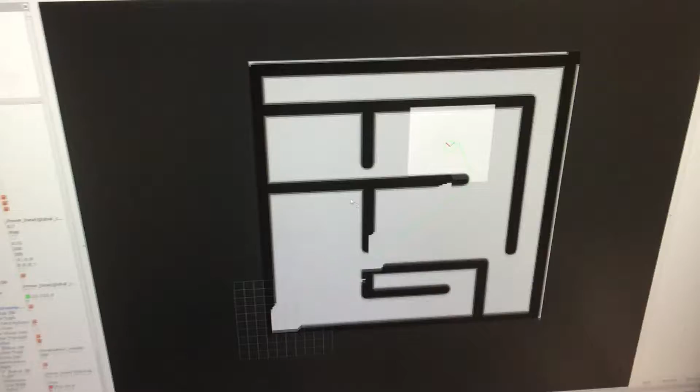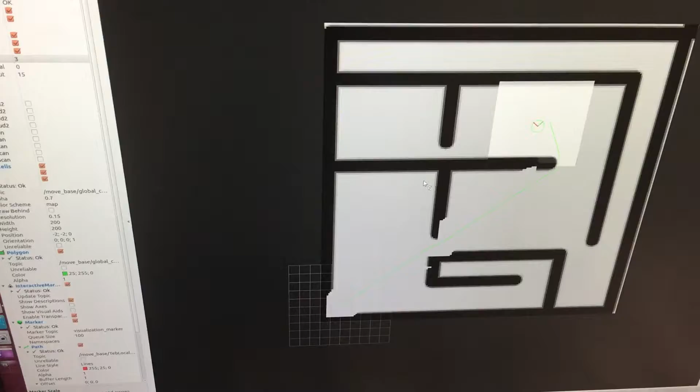Alright, here's a video of us implementing the elastic band planner. So here we have the simulator running on this side, and hooked up to our simulator, of course, the Matrice itself. And on this side we have the simulator running on one of the onboard computers. And this is how we plan on performing obstacle avoidance.

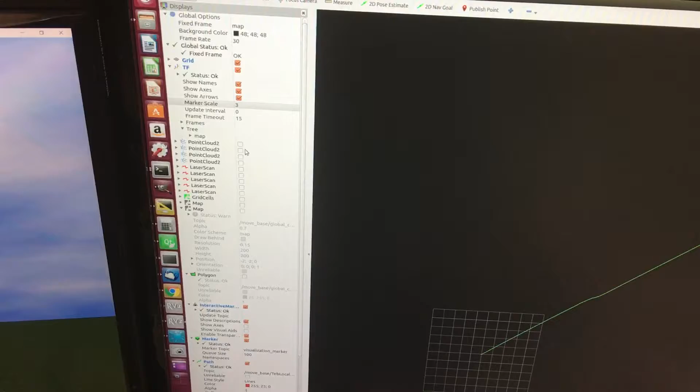Basically we have laser scans; we have both point clouds and laser scans. Let me just show you what they look like. They won't make much sense on the map just because the machine's currently sitting still behind me and not actually flying through a virtual environment. So those are the point clouds.

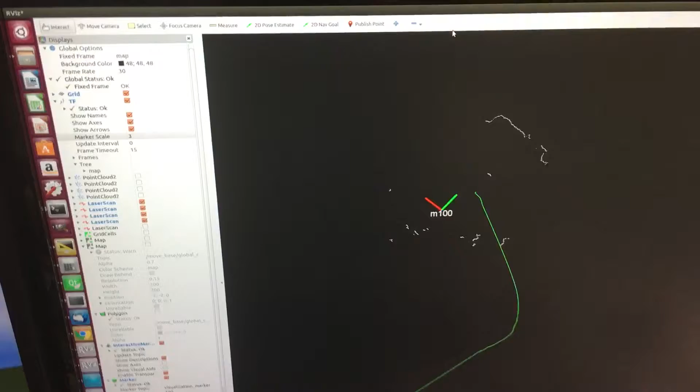And more useful for localization, which we do use AMCL for, is these laser scans. So here you can see the outline of my living room. And these are just laser points that are basically extracted from the point cloud. And this allows them to be used with other packages such as AMCL or even G-mapping if we want to create maps.

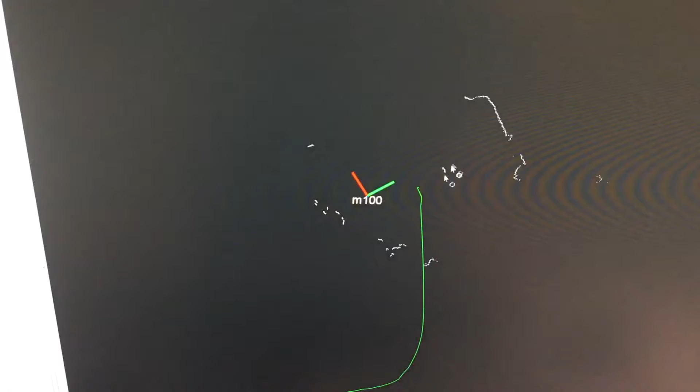There are packages that use point clouds, but unfortunately, given the limited processing space and the fact that we probably don't need 3D maps, a 2D map will do the job. And this will be great for localization inside of a building, and that way we can ensure that our Matrice has no problem finding its way back out through the door. So those are the sensors that we'll be using mainly for obstacle detection. Off, and go back to the navigation simulator.

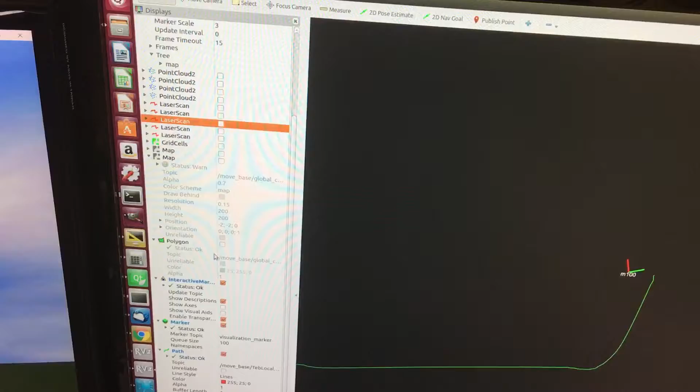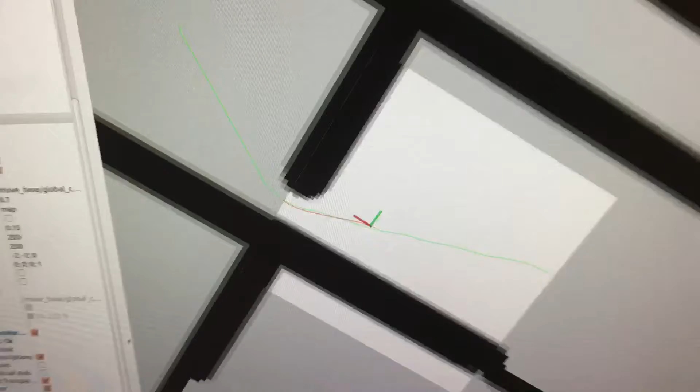Alright, so here we're back at the simulation. There are currently two methods we implement for navigation. The default ROS stack uses what they call move base, which are velocity commands. But as you can see, there are these lines that are generated for the trajectory. We can actually use those lines for navigation as well. So instead of using velocity, we can use waypoints.

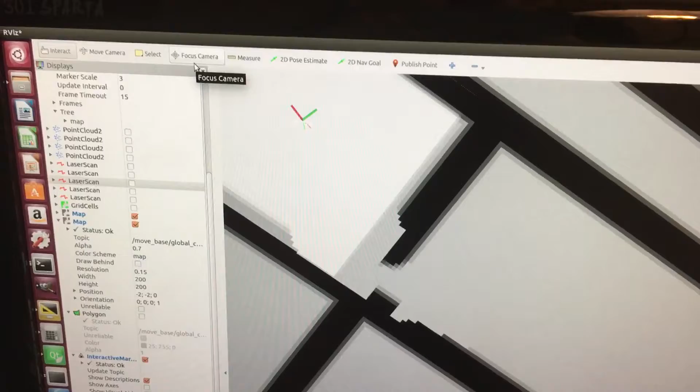So you notice there are two lines. There's actually a local trajectory and a global trajectory. The global trajectory has a much slower update, so it's not as useful for obstacle avoidance, or something that is dynamically generated. So for obstacle avoidance, if we want to use waypoints on the trajectory, we probably want to stick with the local trajectory. And that one, I think we have set updating at 20 Hertz.

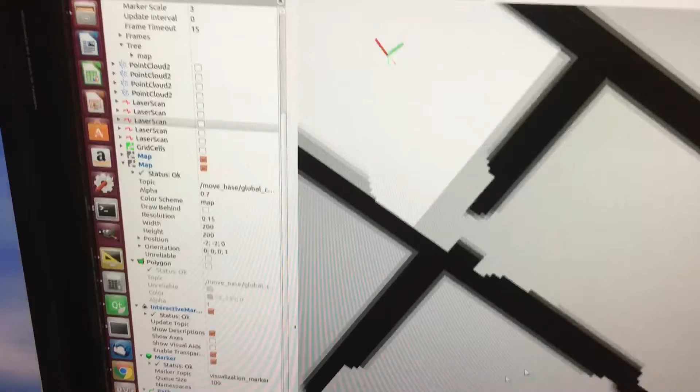So just a quick demonstration. See if we can make it all the way there. And just to show you that it's actually being run on a simulator right here. There it goes. So the red line is the local trajectory, and the white box around it is the local cost map, and that's the cost map that's mainly used for generating updates for obstacles.

So here in this demonstration, I believe we're using the velocity commands, and they work pretty well, mainly because they are kind of slow. Let's take a look. Yeah, it's barely approaching. So if you add those two up, it's still under 1 meter per second. Look.

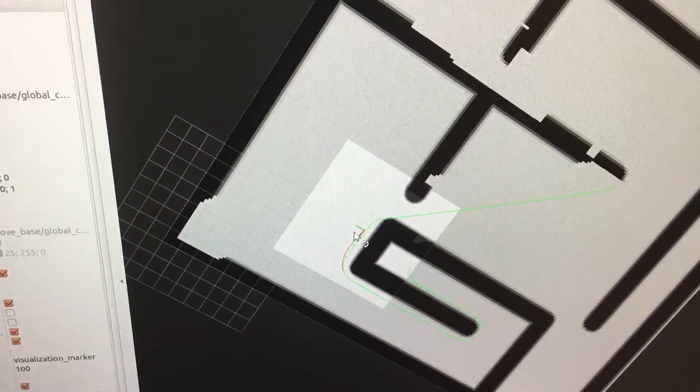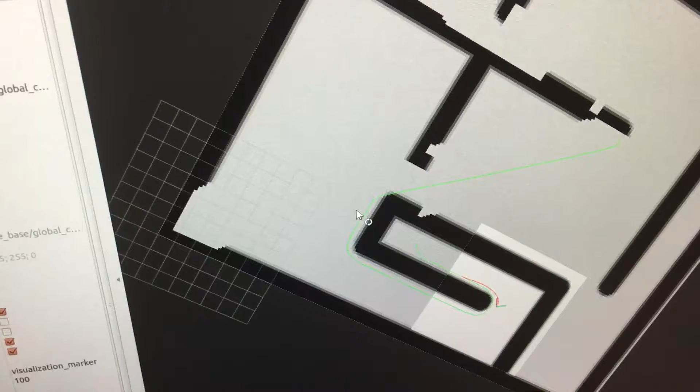So there's still quite a few things we need to adjust with the parameters to make sure it works correctly. And we also have to test on the actual aircraft. We'll do testing a little later just because we had a few accidents, but that's not a big deal. We've done velocity-based commands before and they're pretty stable. And at speeds of less than 1 meter per second, I don't expect anything to go wrong. Should be a pretty straightforward test. And there you go. It navigated all the way from this room to that room.

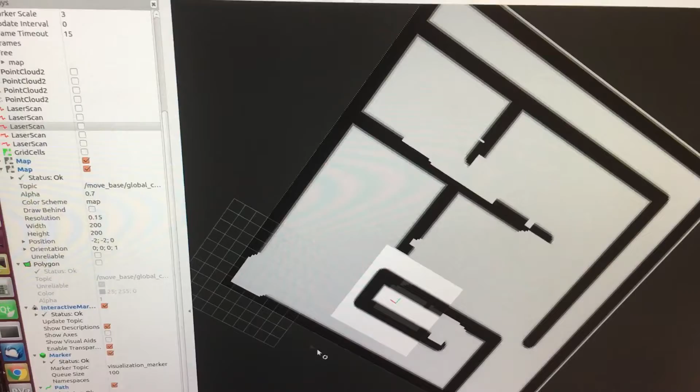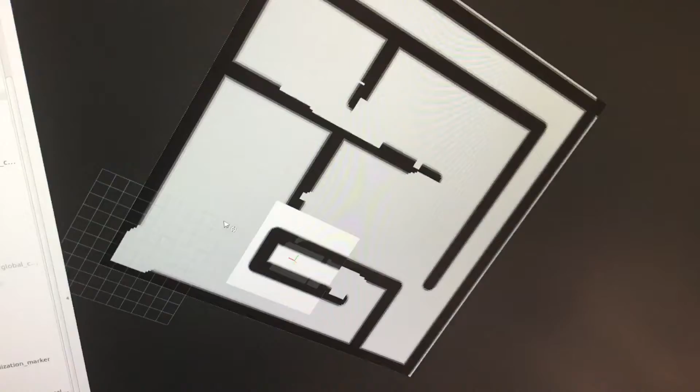So in the real world, we actually won't, but what we'll do is in this white square, the local square, it will dynamically generate obstacles based on the laser scanners. As I've shown you before, we have near 360 detection from the laser scanners and the guidance sensors. There are 30-degree dead spots on each corner though. So there you have it: the simulation of our Matrice flying through a maze, which also has inherent abilities to dodge obstacles.